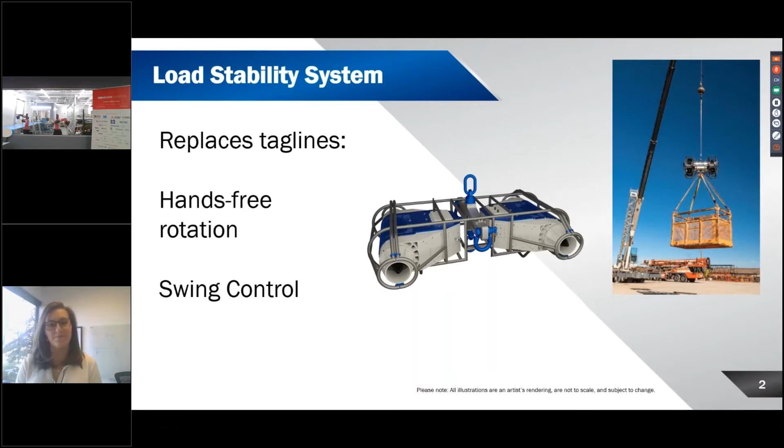It works in 3 simple steps. First, our system senses the chaotic motion that would be affecting your load and making it sway or rotate the way you didn't want it to. And then second, we fuse and interpret this data on an onboard computer. And then finally, we use thrust from electric ducted fans to completely counteract any of the swinging and the rotation that your load might have. This keeps the load directly plumb beneath your crane throughout the duration of the lift. Can I get the next slide?

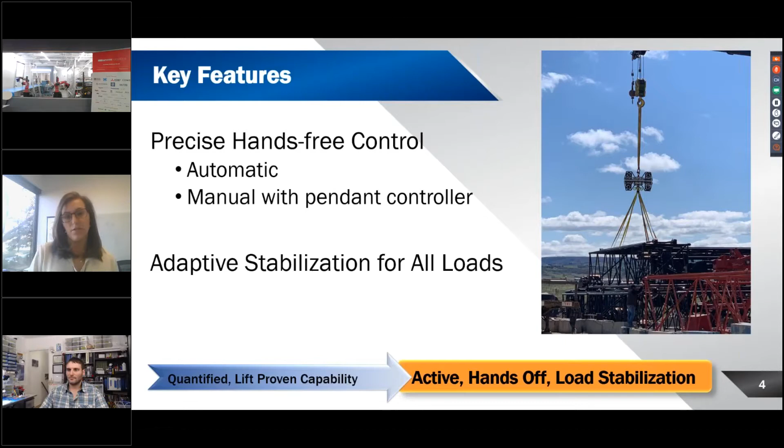So some of the key features we really have with the system is that hands-free control. So we use a remote pendant to allow either the crane operator or your riggers to rotate precisely the load exactly into the position that you want it. This keeps them in the safe lifting zone and eradicates the need to use taglines and have our riggers in dangerous positions. It also can stabilize any of the loads that you're putting on your crane. So it's active and hands-off, constant stabilization of the loads that you have. Slide.

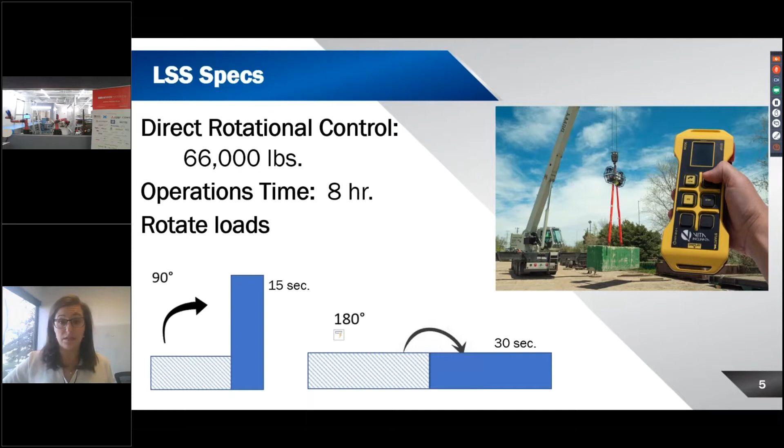So kind of getting into the details here, we can rotate loads up to 66,000 pounds with a lot of variation because our system is modularly built, and then operation times can exceed up to 8 hours. When you're talking about in the field use, with our remote pendant, you can rotate the load 90 degrees in 15 seconds or 180 degrees in 30 seconds. Even with these larger rotations and then the micro movements for putting it into precision place, the pendant allows the rigger or the operator to complete all of these much quicker than we can currently with taglines. Slide.

We also make the lifting faster and safer. And with our system using the remote pendant and a couple buttons to orient it, you really don't spend much time on training your team, and the maintenance cycles are pretty long in between as well. Slide.

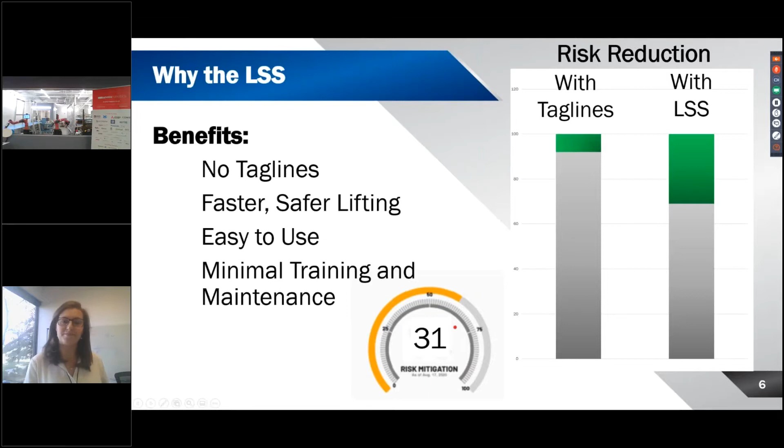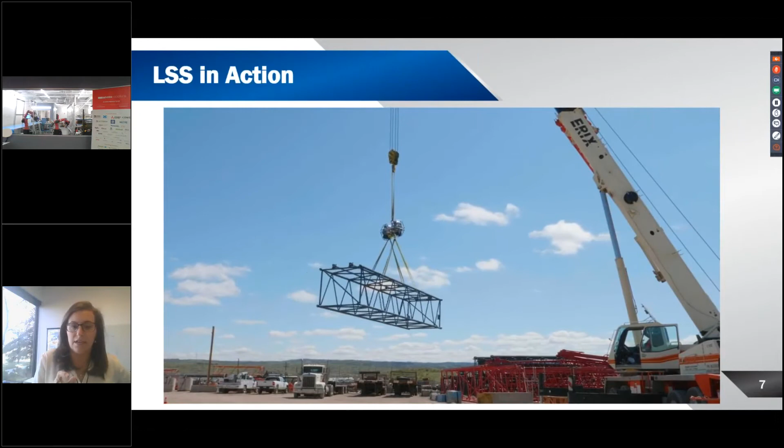So we're going to see a video here. Oh, perfect, it's running. So in this use case, we were positioning part of a tower crane, and you can see here how the pendant is able to be operated by a remote rigger who doesn't need to use a tagline or try the precision lifting several times with a couple of riggers to get it into place. Our system actually allows you to just spin it directly into place and then drop the load.

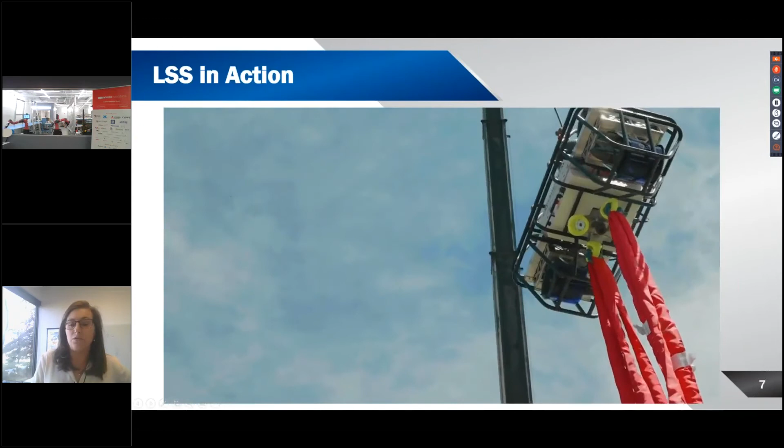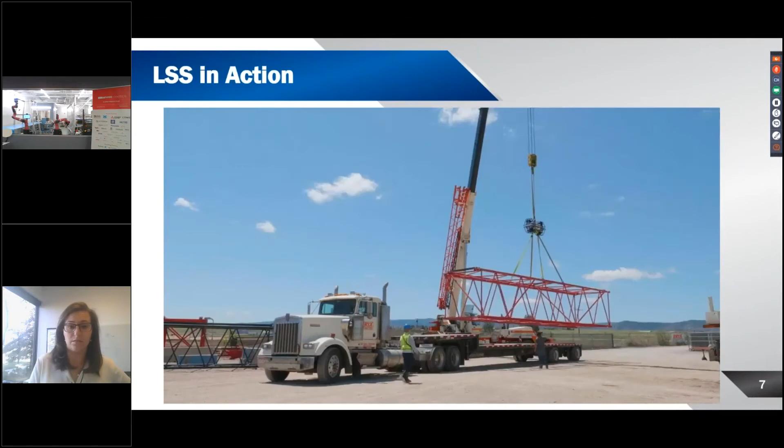We'll see real benefits from that precision placement in most operations, but with a highlight on duty cycle loads because you can make them so much more efficient. And then anything where you need to precisely position a load as you're setting it down, our system really excels there. And we'll get into some examples here in a moment.

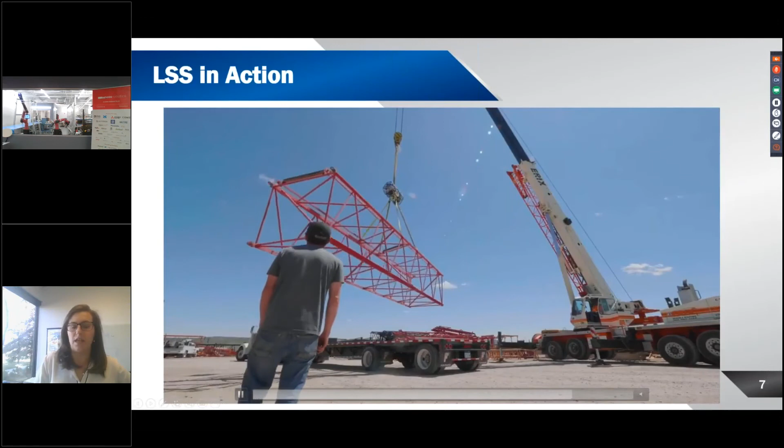But you can see the operator can stand on the ground, he can stand in the cabin of the crane. Because it's so simple to use, you can really pass it around with the riggers fairly easily.

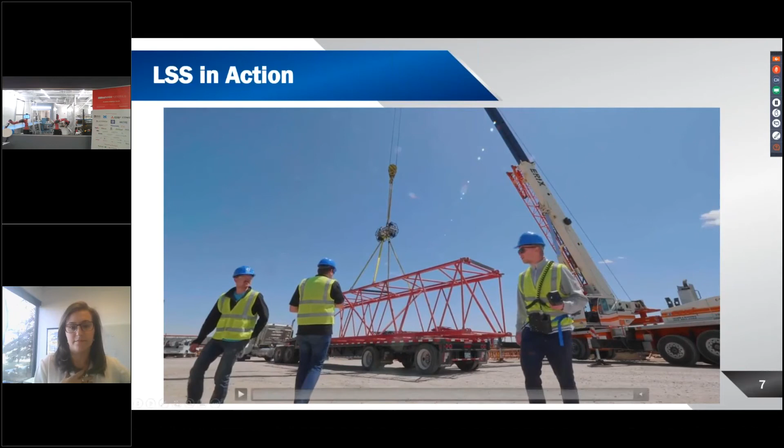Perfect. So one of the examples that I prepared for you today is steel erection. So with our system being modular in design, we can scale it up and then scale it down for the use case pretty easily. For steel erection, the real benefit people see here is that you don't have any more Christmas tree. And that is a problem that's slowly phasing out of the industry, but still prevalent in some cases.

And because our system is able to keep the load directly plumbed beneath the crane, you'll not have the movement there of the panels and the steel. So it allows for a much safer and more precise tower crane erection. Slide.

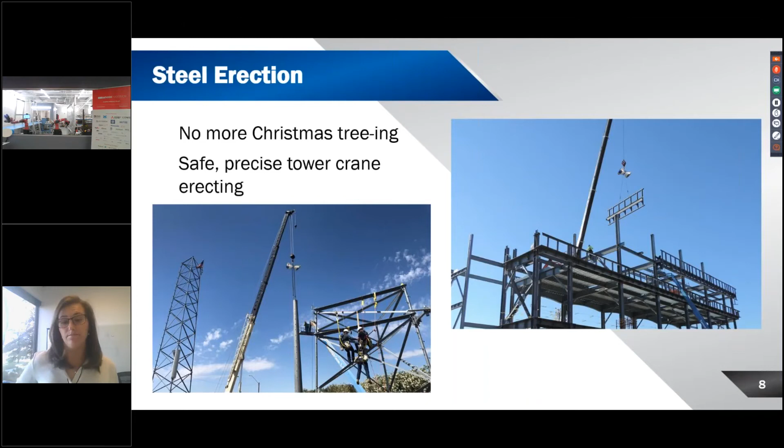We also have precast concrete. So we all know there's a huge issue with kiting in precast concrete, and it's not a great application for tag lines due to the size of the loads. But we can use the system here to stabilize any kind of load sway and the rotation. The great thing for this application is that our system is adaptive, and so it can continue providing the stability both rotationally and for the sway if you've got weather coming along.

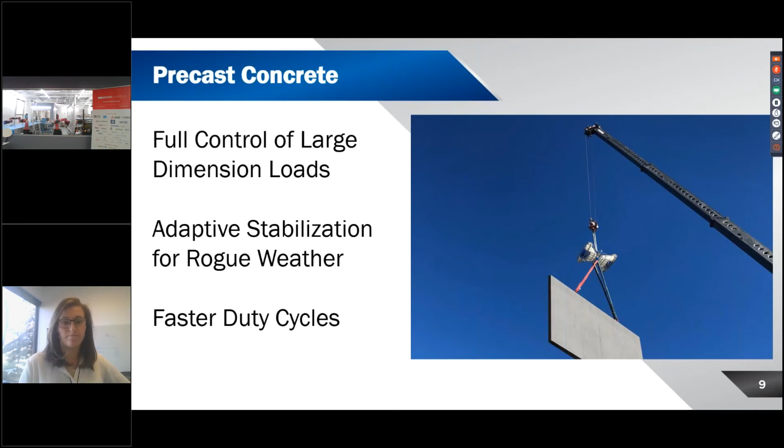The third application I wanted to highlight for you guys today is the modular building. So because you need such precise placement and the pieces are coming together, using riggers with taglines can be a bit of a difficult obstacle on modular build sites.

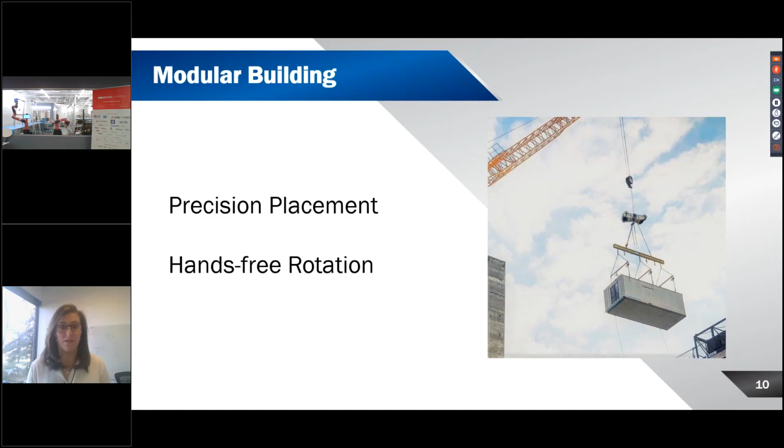But our system would allow the rigger to stand away from the modules that you're moving at the moment, and then use the toggle part of the pendant to just rotate them directly into place while standing to the side. So you're not putting riggers in the load path, you're not trying to position and reposition for those precise placements, but you can do that on the first try remotely using the active stabilization. Slide.

It's been a real pleasure talking with you all about this and really talking about the future of robotics in construction as the industry is moving in that direction so quickly.